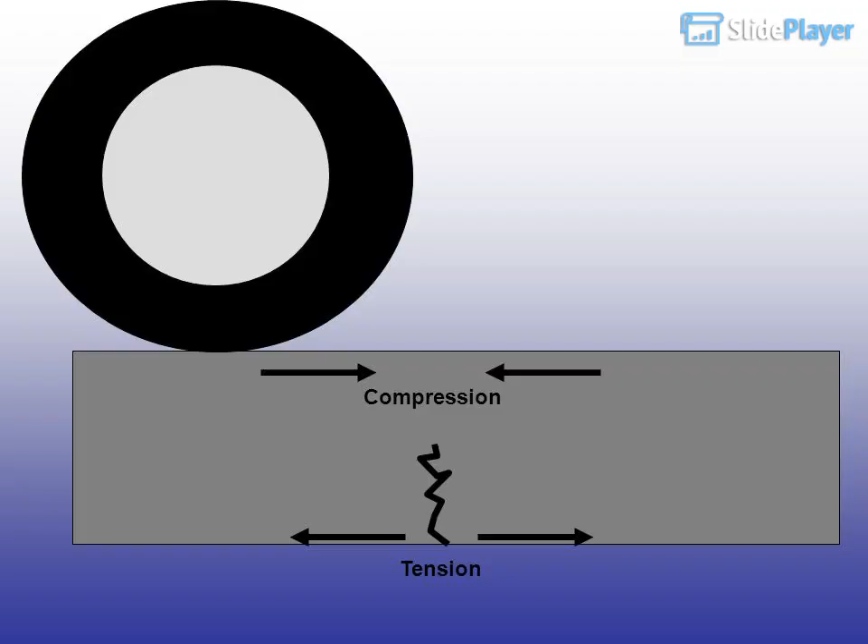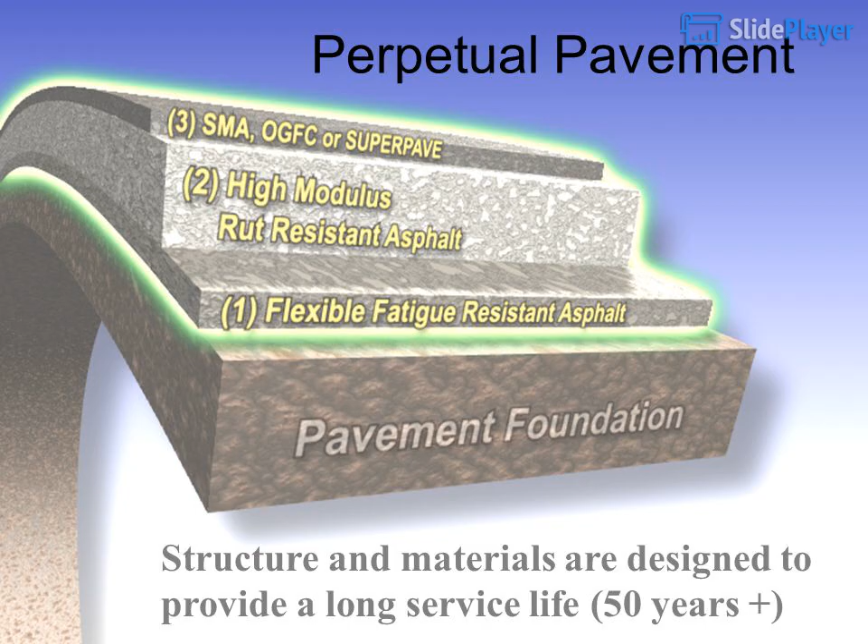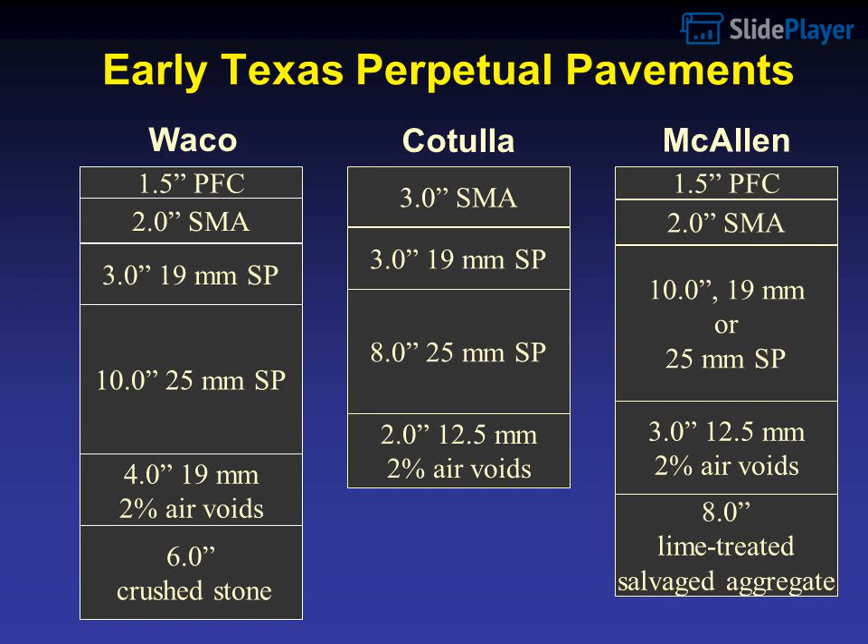Early Texas perpetual pavements: Waco, Cotulla, McAllen. Layer structures include 1.5 inch PFC, 2.0 or 3.0 SMA, 3.0 inch 19mm SP, 8 to 10 inch 25mm SP, 2 to 4 inch 19mm or 12.5mm layers, all at 2% air voids, over a 6 to 8 inch crushed stone or lime treated salvaged aggregate base.

Additional Waco, Cotulla and McAllen sections: 1.5 inch PFC, 2.0 to 3.0 SMA, 3.0 inch 19mm SP, 8 to 10 inch 19mm or 25mm SP, 2 to 3 inch 12.5mm or 19mm layers at 2% air voids, over 6 to 8 inch crushed stone or lime treated salvaged aggregate base. Totals: 16, 20.5, and 16.5 total inches of HMA.

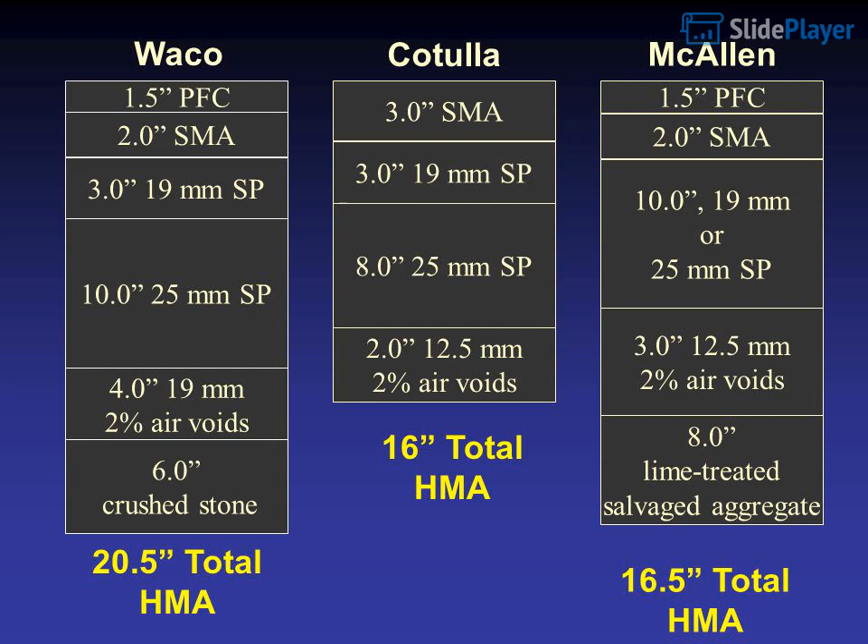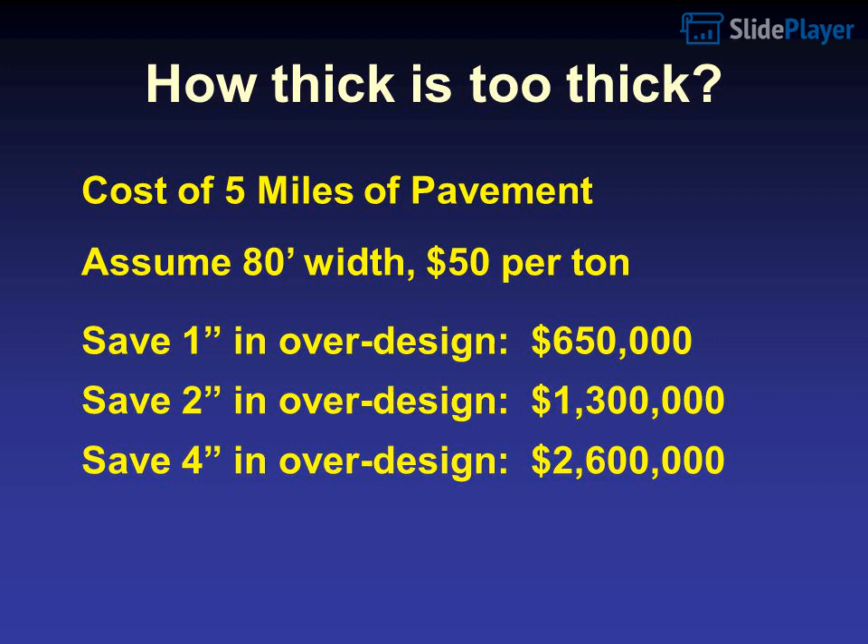How thick is too thick? Cost of 5 miles of pavement, assuming 80 foot width at $50 per ton. Save 1 inch of over design: $650,000. Save 2 inches of over design: $1,300,000. Save 4 inches of over design: $2,600,000.

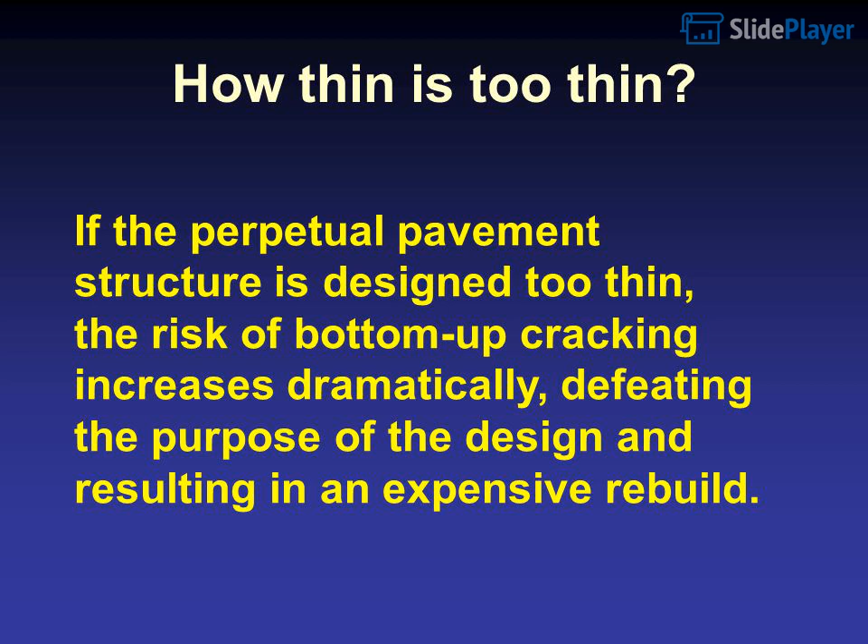How thin is too thin? If the perpetual pavement structure is designed too thin, the risk of bottom-up cracking increases dramatically, defeating the purpose of the design and resulting in an expensive rebuild. A rut-resistant material is used, and to design the appropriate pavement thickness, engineers must evaluate stresses and strains.

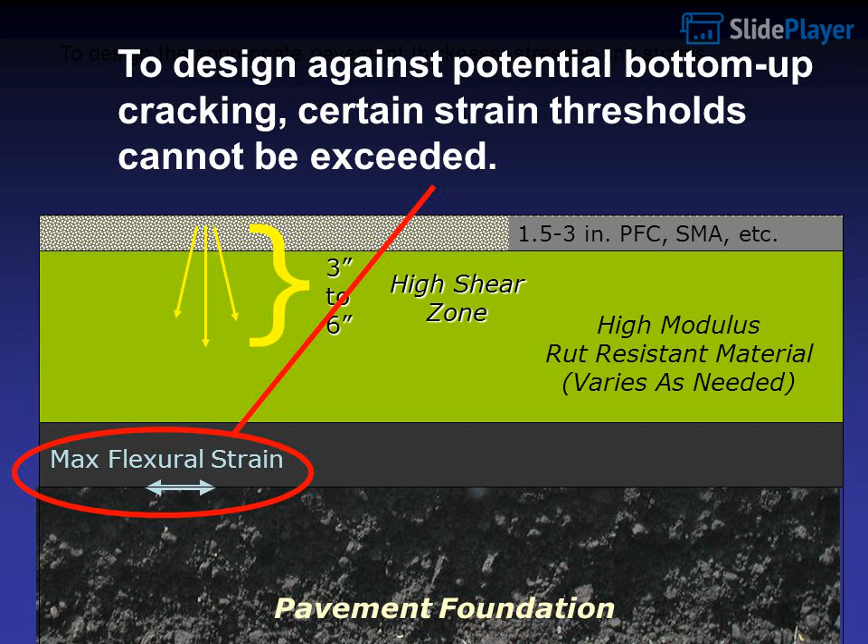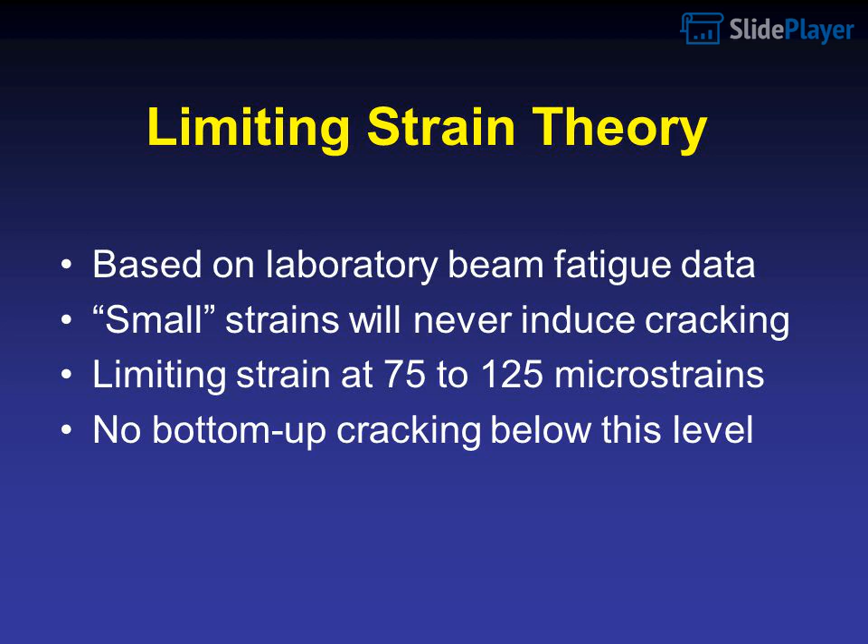This is the limiting strain theory. Based on laboratory beam fatigue data, small strains will never induce cracking. The limiting strain is set at 75 to 125 microstrains, below which no bottom-up cracking occurs. These strains can be calculated based on total pavement thickness and material properties.

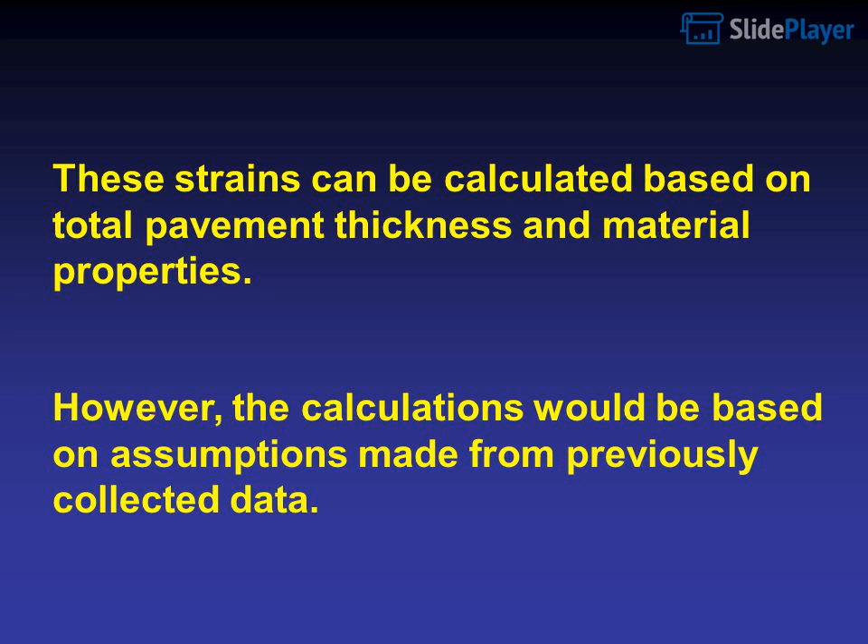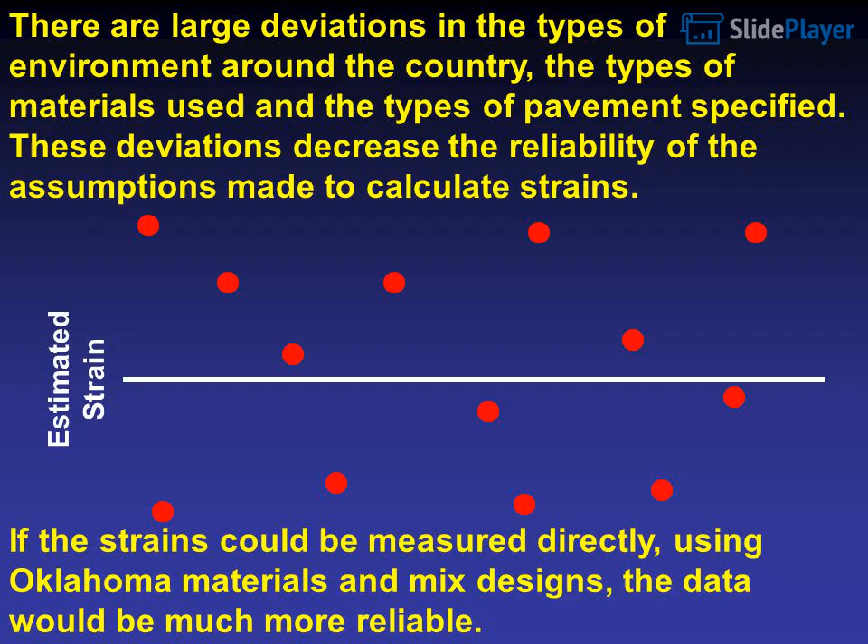However, these calculations would be based on assumptions made from previously collected data. There are large deviations in the types of environment around the country, the types of materials used, and the types of pavement specified. These deviations decrease the reliability of the assumptions made to calculate strains. If the strains could be measured directly using Oklahoma materials and mix designs, the data would be much more reliable - this is the purpose of the National Center for Asphalt Technology, NCAT, Test Track.

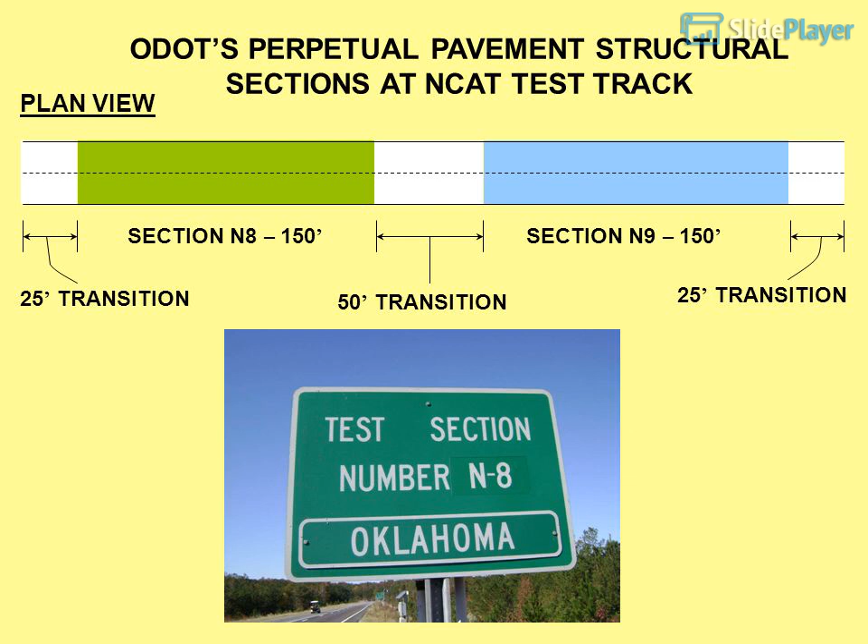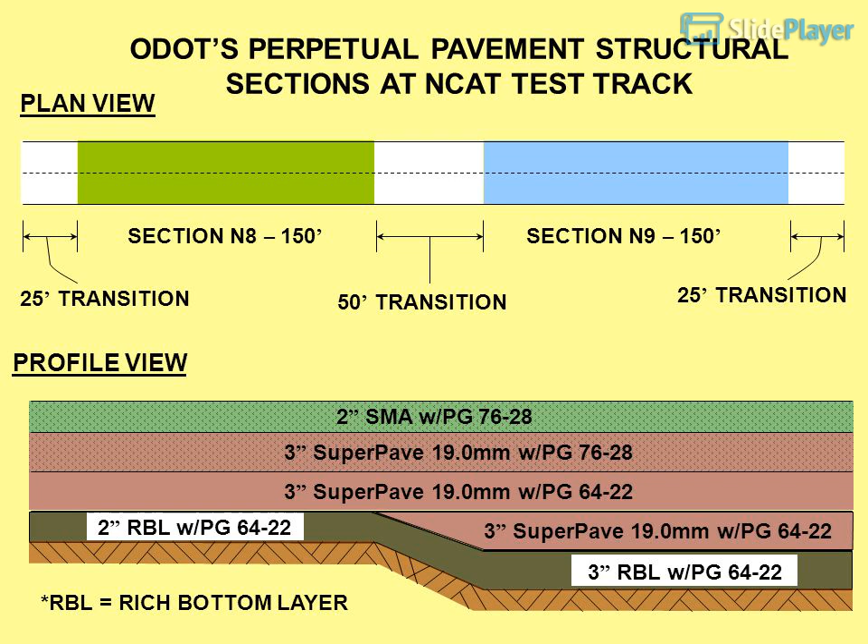These structural study test sections, N8 and N9, are part of an 11-section structural experiment starting in 2006. FHWA has partnered with Oklahoma on section N9 to have additional instrumentation installed to more precisely measure strain and temperature at various depths.

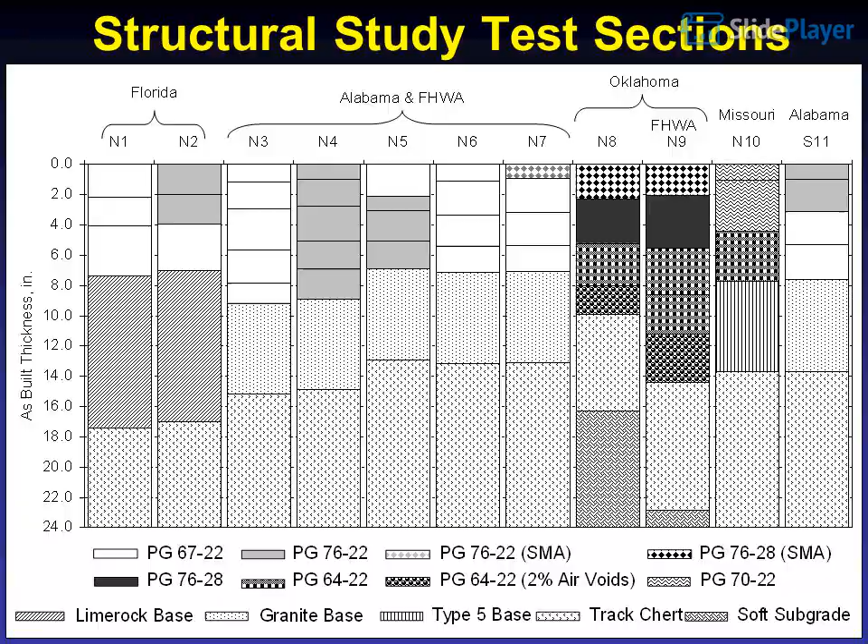There is an error on this graphic - please note that the Missouri Type 5 base is only 4 inches thick. The maximum flexural strain is directly measured using a series of strain gauges installed at the bottom of the asphalt section, which includes 1.5 to 3 inches of PFC, SMA, etc., a high modulus, rut-resistant material varying as needed, with max flexural strain at the pavement foundation.

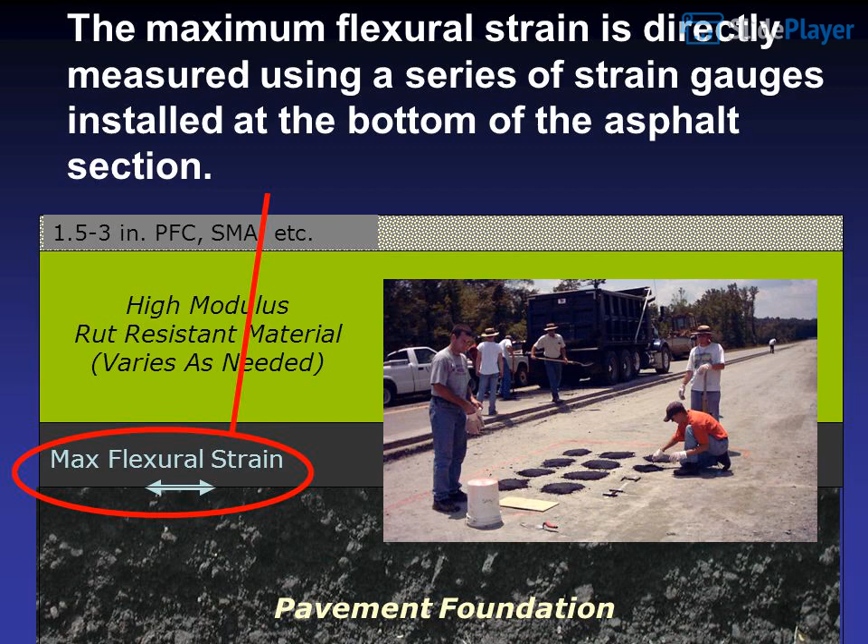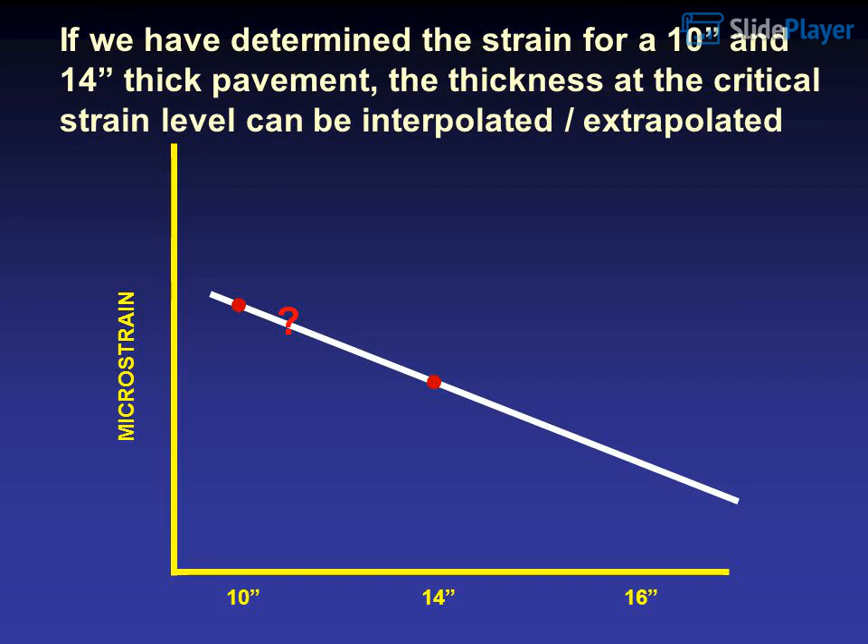If we have determined the strain for a 10 and 14 inch thick pavement, the thickness at the critical strain level can be interpolated or extrapolated, comparing microstrain values across 10, 14, and 16 inch thicknesses.

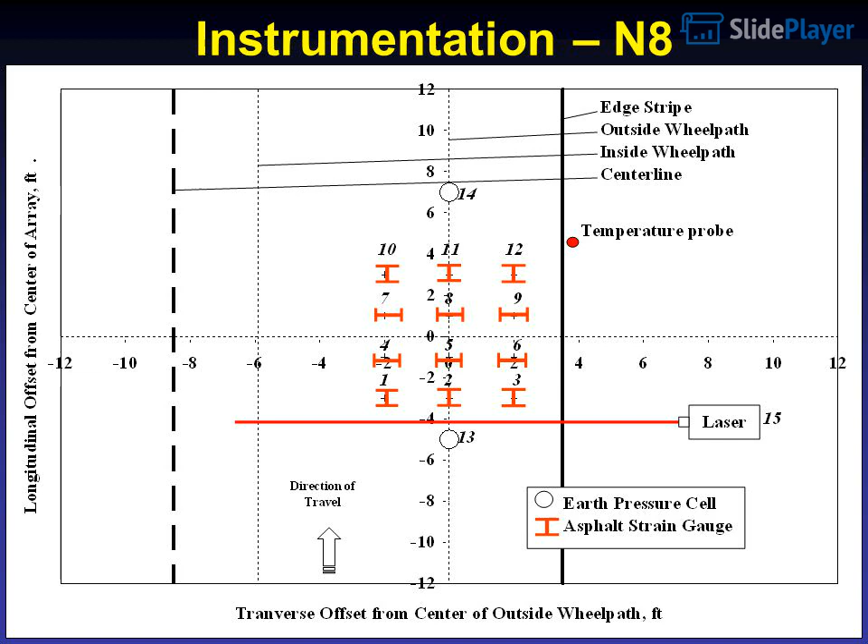Instrumentation in section N8 includes 12 asphalt strain gauges, 6 longitudinal and 6 transverse, 2 pressure plates - one at the top of the base and one at the top of the subgrade, a laser to measure wheel wander, and a temperature array to measure temps at the top, middle and bottom of the HMA.

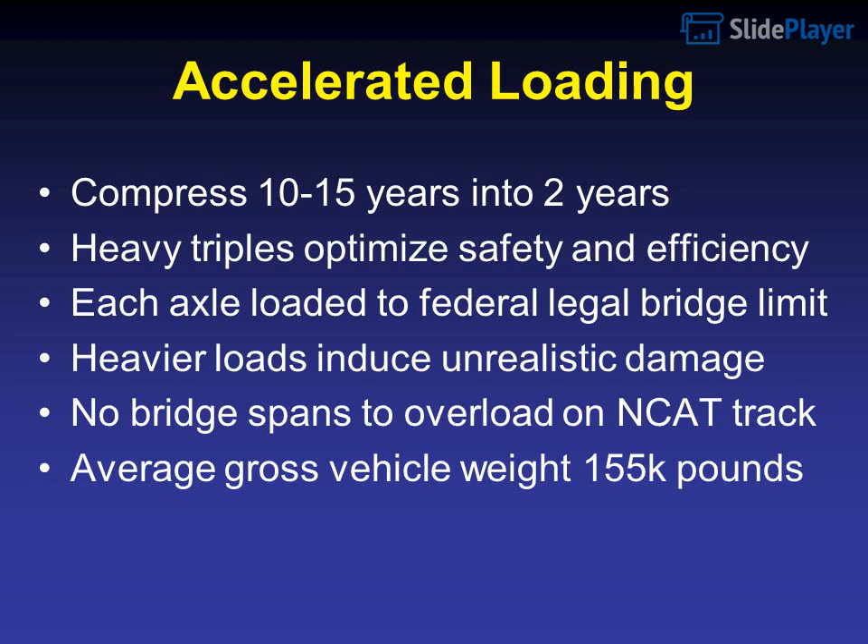Accelerated loading compresses 10 to 15 years into 2 years. Heavy triples optimize safety and efficiency, with each axle loaded to the federal legal bridge limit. Heavier loads would induce unrealistic damage, and there are no bridge spans to overload on the test track. Average gross vehicle weight is 155k pounds.

These are long-term response measurements: weekly, 3 passes of 5 trucks, each with a 12 kip steer axle, 40 kip tandem, and 5 single axles at 20 kip per axle, traveling at 45 miles per hour. Strain, pressure, and temperatures are measured to characterize long-term trends in strain response.

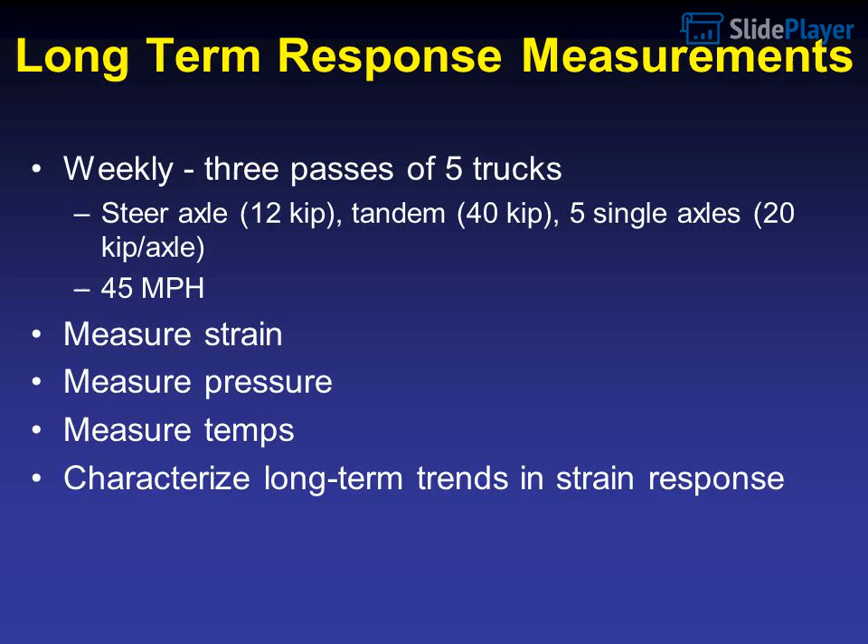The graph shows transverse strain in section N9 for one truck pass. The steer, tandem, and 5 single axles are clearly visible in the data.

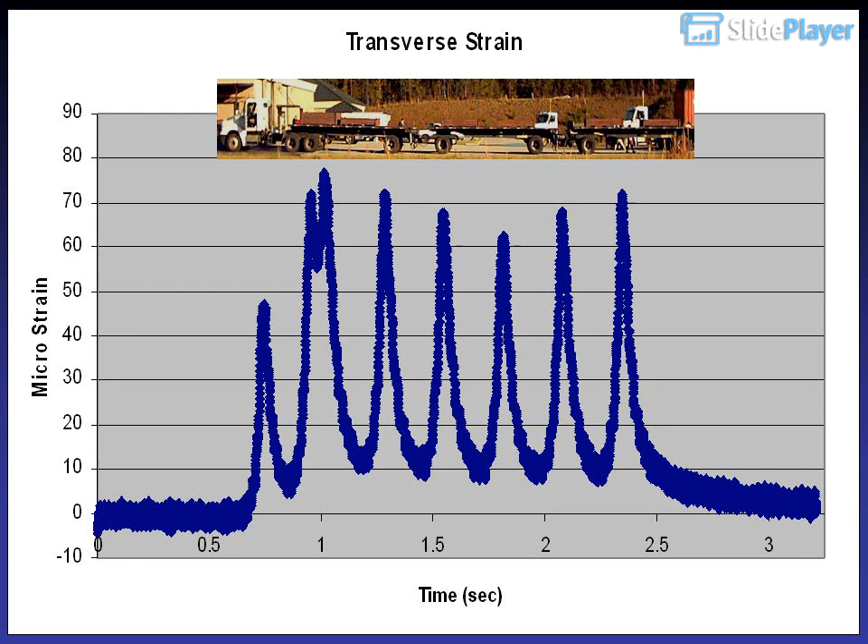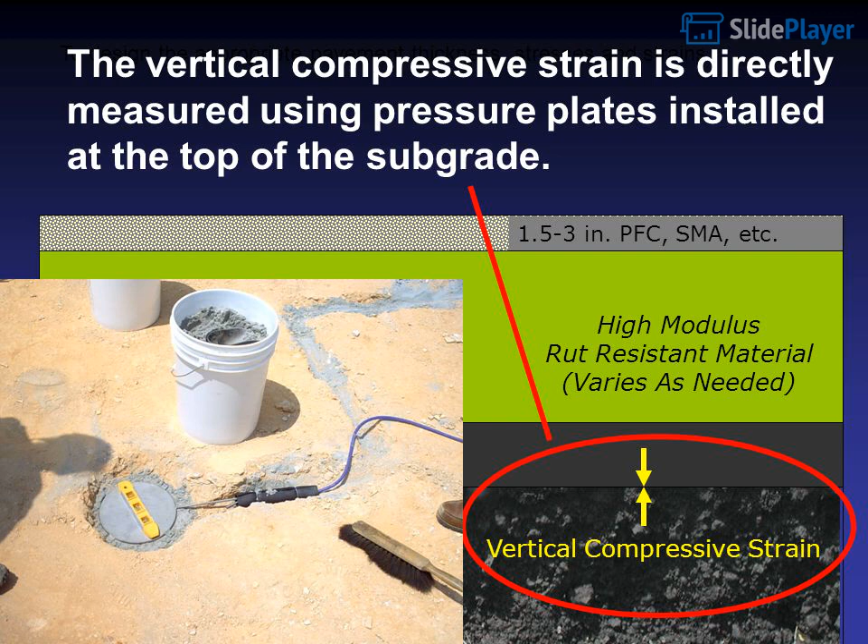To design the appropriate pavement thickness, stresses and strains must be evaluated. The vertical compressive strain is directly measured using pressure plates installed at the top of the subgrade, beneath layers including 1.5 to 3 inches of PFC, SMA, etc., a high modulus rut-resistant material varying as needed, with max flexural strain and vertical compressive strain both measured.

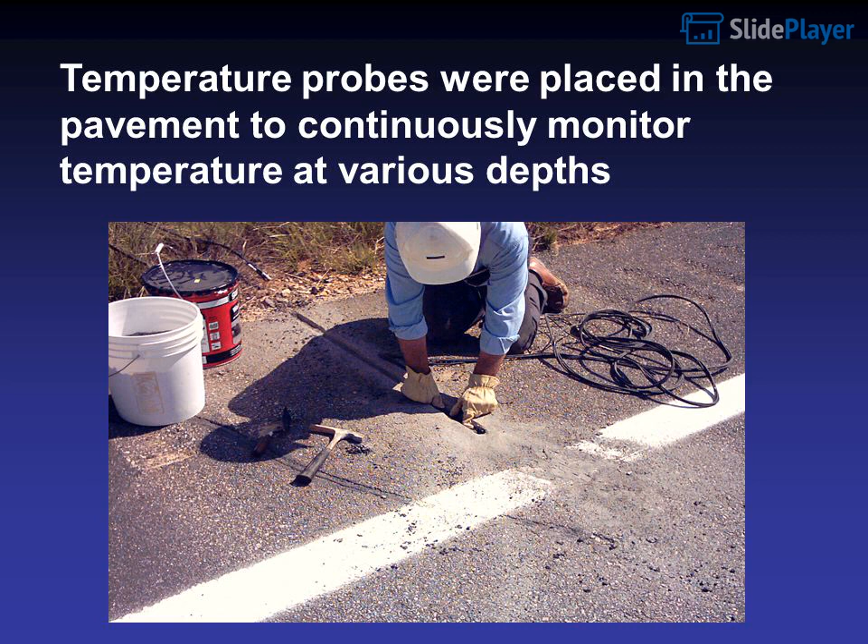Moisture sensors were also placed in the subgrade to continuously monitor soil conditions. Temperature probes were placed in the pavement to continuously monitor temperature at various depths, and a data logger is used to collect information from the different pavement sensors.

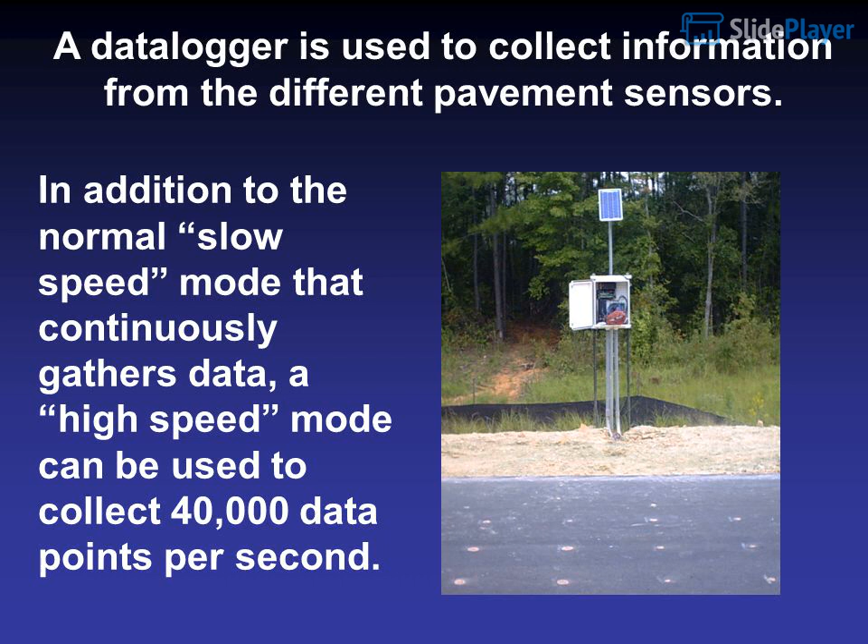In addition to the normal slow-speed mode that continuously gathers data, a high-speed mode can be used to collect 40,000 data points per second. Additional testing includes surface map cracking.

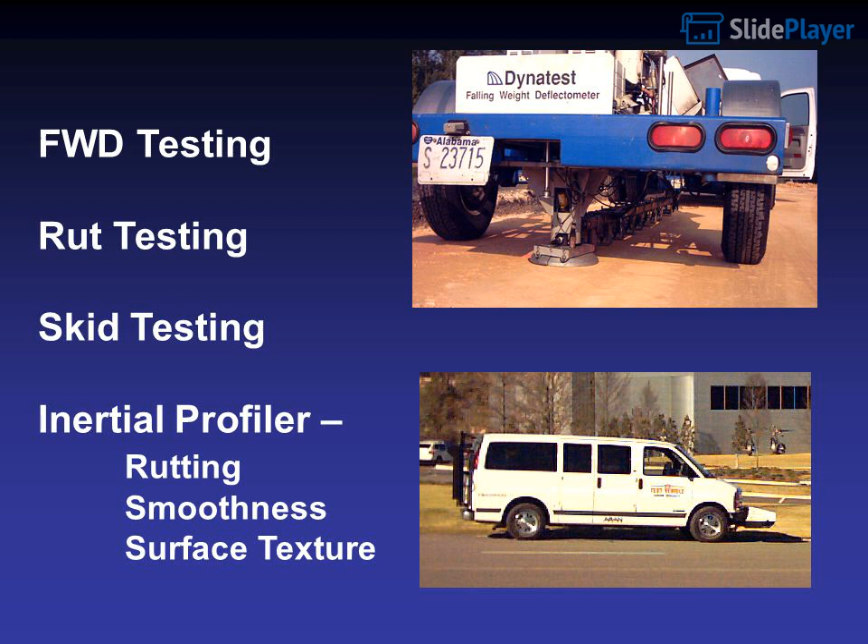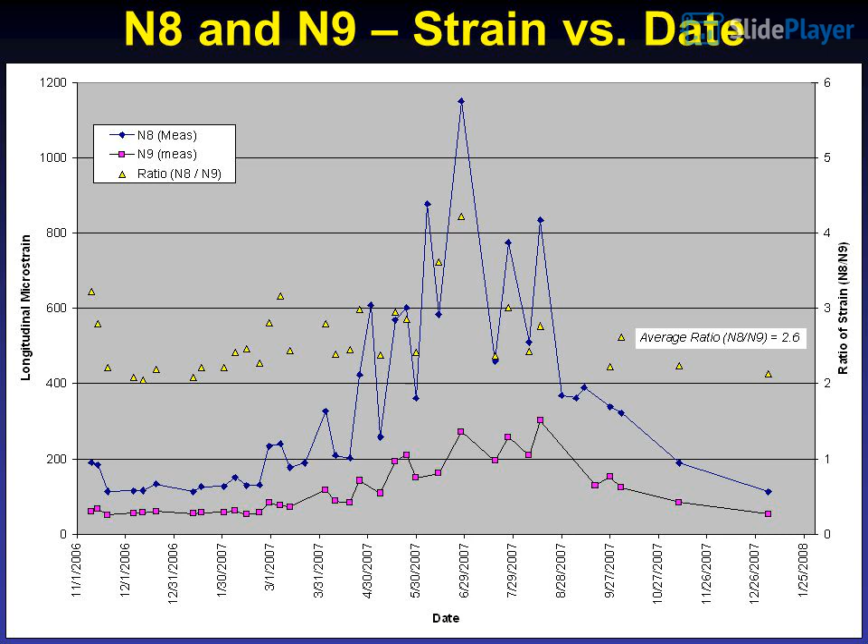The seasonal trend is also evident in both sections, where the strains rise significantly in the warmer summer months.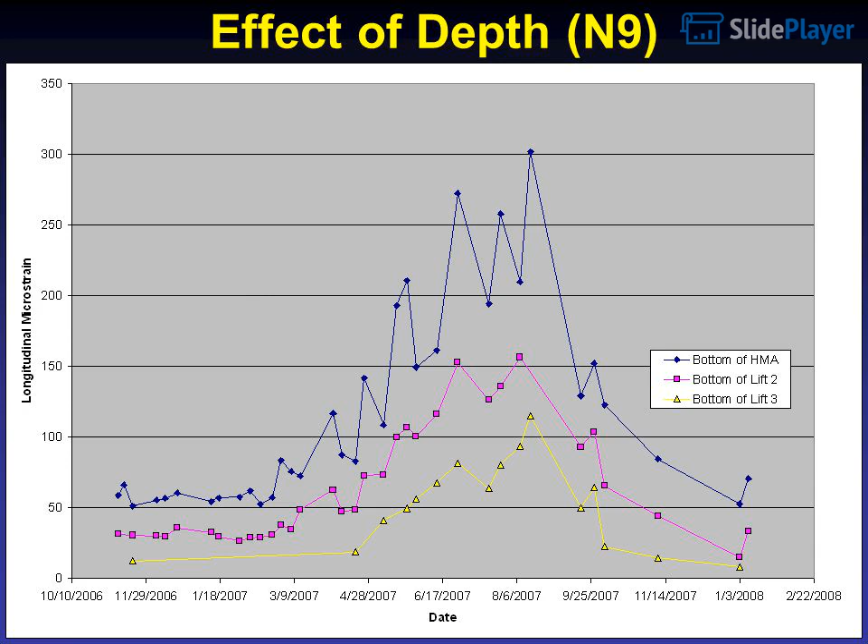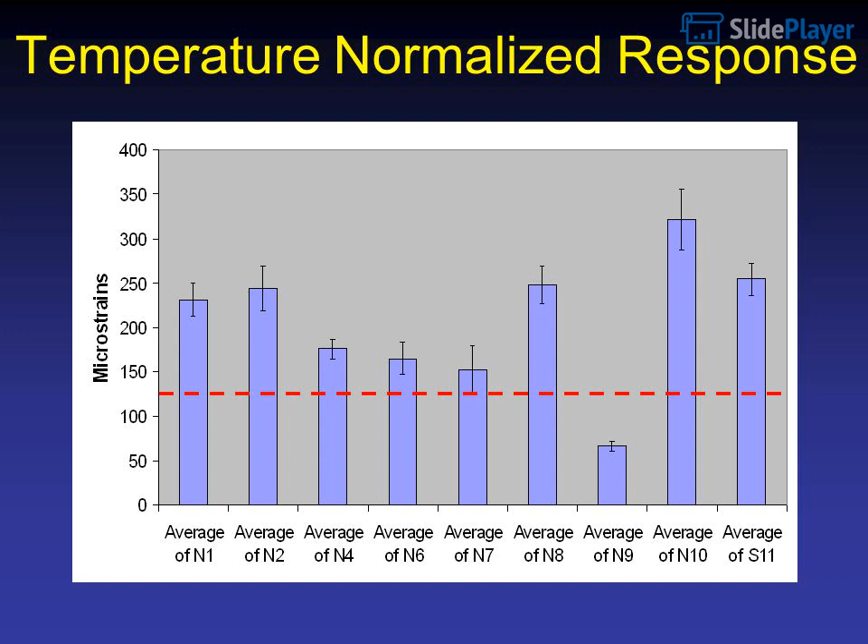Temperature normalized response. Section N9 is the only section in the structural experiment that could be classified as perpetual based on these average temperature normalized responses. However, the analysis is ongoing.

Normal operations, 55% of strains below threshold. The measured mid-depth HMA temperature was used with the speed and temperature equation to determine strains between the start of the experiment, the 11th of October 2006, and the 14th of January 2008.

As shown in the graph, and shown previously for both N8 and N9, the seasonal trend is clearly evident. Also, strains in N9 can be quite high. For example, the highest measured temperature was on August 9, 2007, 118 F, between 6 and 7 p.m. During this hour, strains were on the order of 580 microstrain.

Again referring to a fatigue threshold of 100 microstrain, the graph shows that approximately 55% of the strains were below the threshold, with 45% exceeding the threshold. Until more performance data are recorded, it is difficult to ascertain whether 100 microstrain is appropriate to use as the fatigue threshold. What can be said, however, is that a significant number of strain readings exceed 100 microstrain.

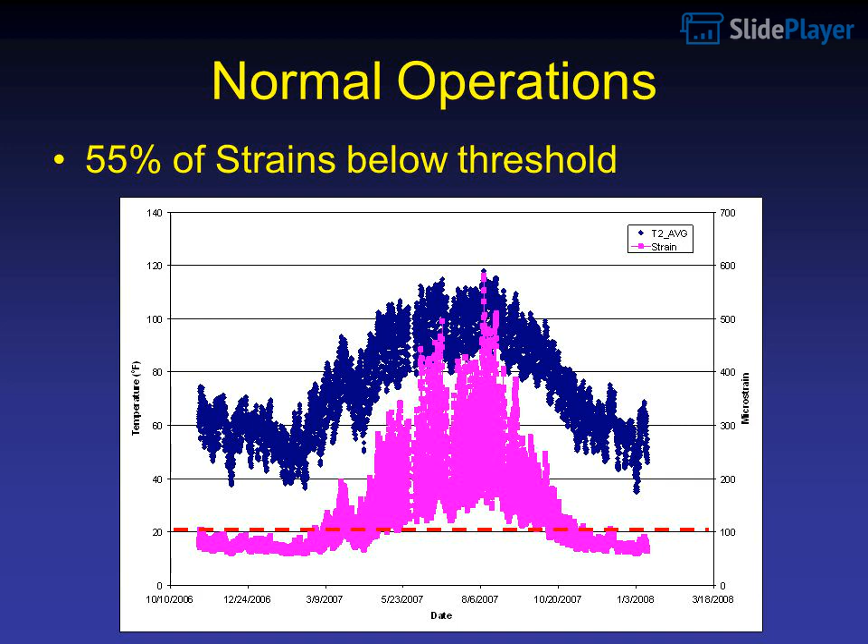It is important to note the difference in how this graph was generated compared to the N8, N9 graph shown previously. The previous graph was generated from measured data only. This graph was generated by developing a strain versus temperature equation from which we could reasonably approximate strains during any hour of testing. Supplemental FHWA experiment.

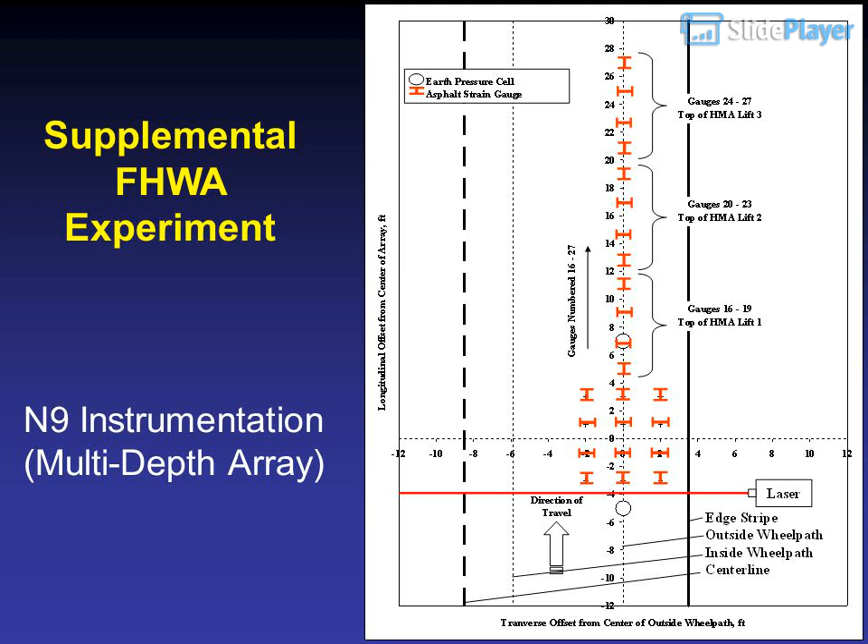N9 instrumentation, multi-depth array: 12 strain gauges at bottom of HMA, 2 pressure plates at top of base and top of subgrade, plus an additional 3 groups of 4 gauges per group measuring strain on top of successive paving lifts. A laser is used to measure wheel wander. N9 cross-section and supplemental instrumentation.

Additional instrumentation funded by FHWA as part of the strain versus speed and temperature study. Instrumentation is the same as N8, plus gauges installed on successive lifts going up into the structure, with more detailed temperature readings at top, middle, and bottom of each paving lift.

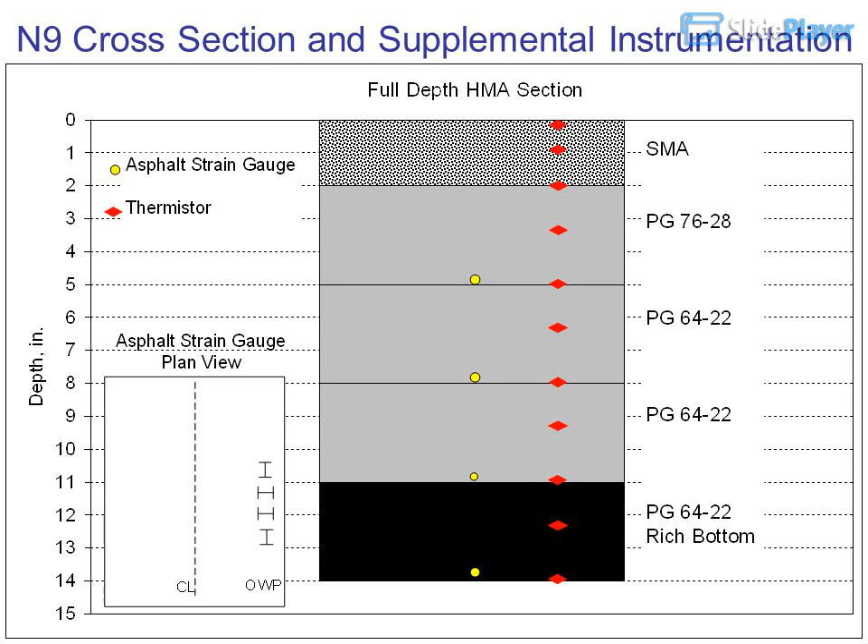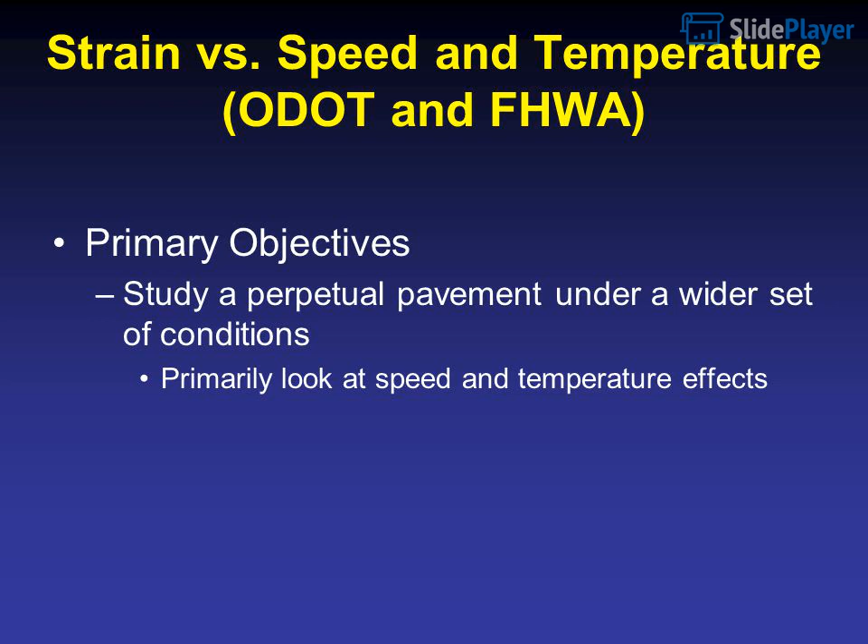Strain versus speed and temperature, ODOT and FHWA. Primary objectives: study a perpetual pavement under a wider set of conditions, primarily looking at speed and temperature effects. Data collected at 4 speeds and on 4 dates measured.

Speeds of 15 to 45 miles per hour in 10 mile per hour increments, across 4 dates from April to May 2007, measured.

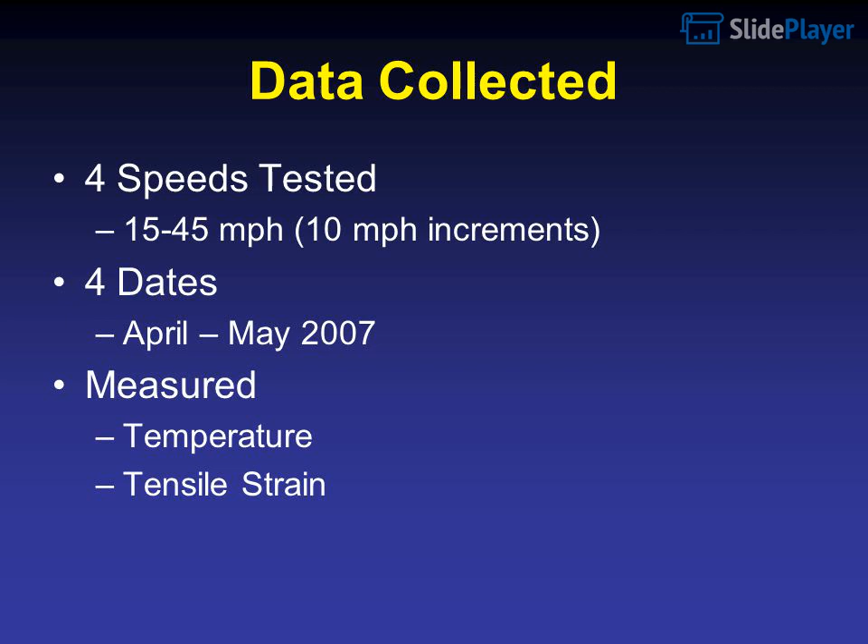Temperature and tensile strain investigations studied relationships between strain threshold and load durations: speed strain, temperature strain, and combined effects. Strain threshold and load durations relate to frequency.

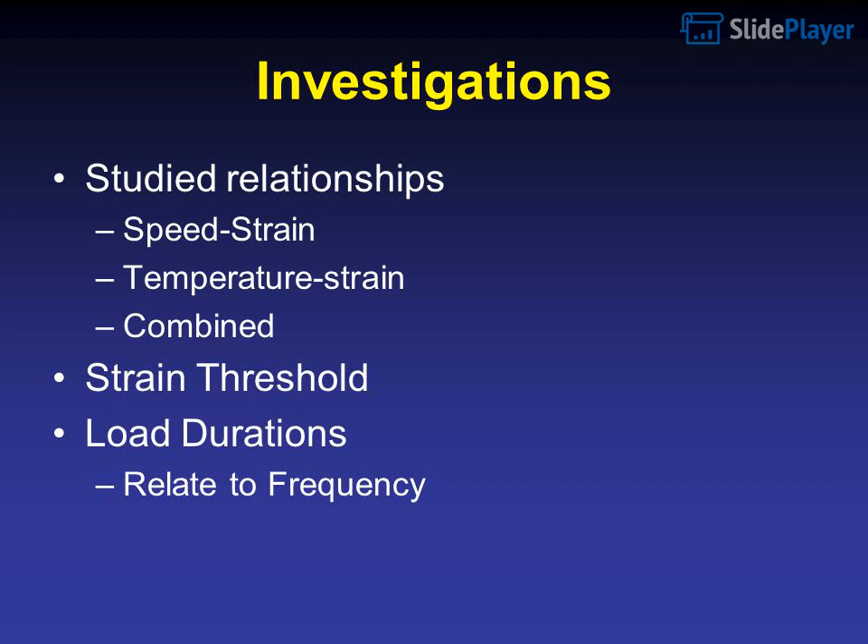Relationships between speed strain and temperature strain at the bottom of HMA: strain decreases with speed, and temperature strain at the bottom of HMA increases with temperature.

Trends were examined that looked first at speed effects and secondly at temperature effects in N9. The first equation shows that strain is related to the natural log of speed and tends to decrease as speed is increased. The second equation shows that strain tends to increase with temperature. A third equation was developed that incorporates both variables.

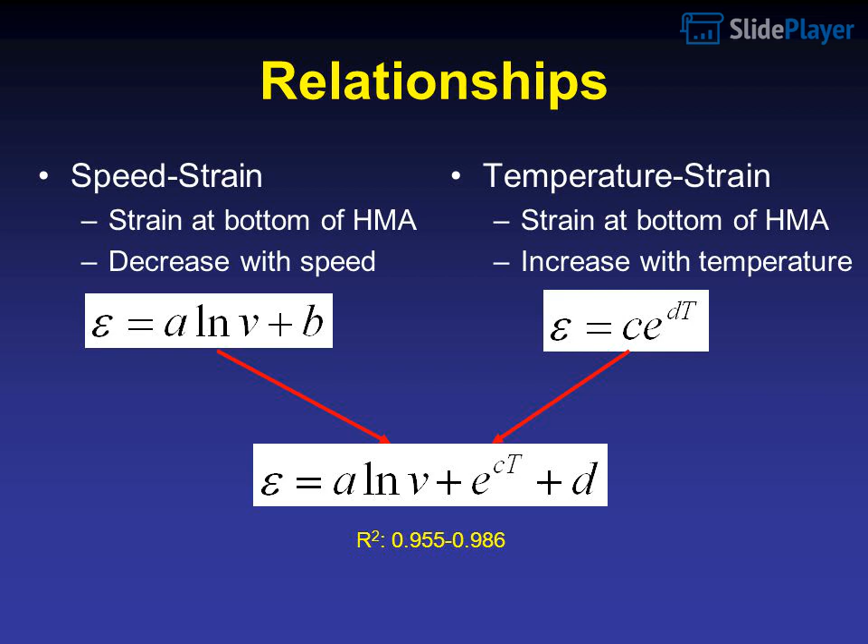The R-squared on the dataset was very high, 0.955 to 0.986. Strain threshold, tensile strain threshold, 100 microepsilon.

These design curves show the effect of temperature on strain at a variety of reference speeds. For example, if the design speed were 45 miles per hour, the critical temperature would be approximately 72 F. Above this temperature, strains would exceed the commonly held fatigue threshold of 100 microstrain.

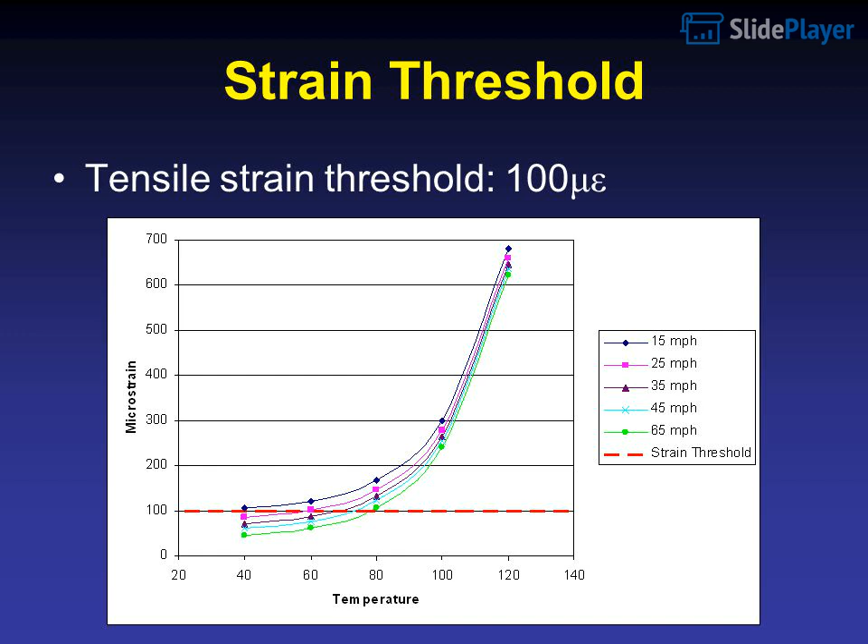At 65 miles per hour, the critical temperature would be approximately 80 F. Curves such as these can help to extrapolate the findings from the test track to those encountered on open access facilities, i.e., in Oklahoma.